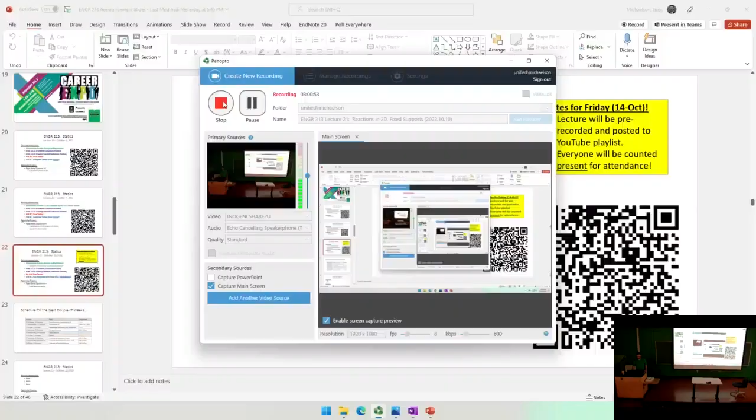Technology is working today, which is great, given what happened on Friday. If you weren't here, somebody had gone in here and yanked an adapter out. I'm pretty sure it wasn't one of the instructors, because these are key locked, I can't even get into that. So the computer was working, but it wasn't projecting to the screen, so we didn't record the lecture. We ended up going retro and doing the problem on the blackboard.

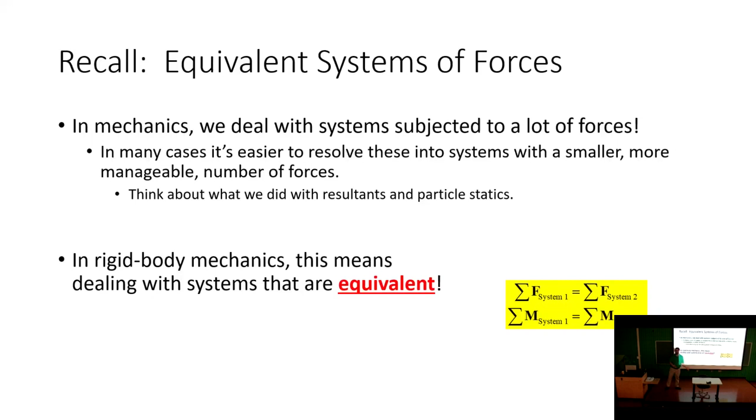So we talked before about the concept of two equivalent systems. The sum of forces in system 1 equals the sum of forces in system 2, and likewise with the moments. The two systems are equivalent if the sum of their forces and the sum of their moments are equal. But now we're in the land of 3D, or the land of equilibrium. Equilibrium states that a system is in equilibrium if the sum of its forces is 0 and the sum of its moments is 0.

For systems that were just particles, where all the forces met at a common point, we didn't have to worry about moments. Now we do, because we have systems where the forces don't all meet at a common point—they're coming in different directions. In 3 dimensions, that means we have 6 equations, 6 unknowns. This is what I meant when I said we're just going to have longer problems in the land of 3D. There's really no way around it.

In 2 dimensions, though, the problems get a lot more manageable. In fact, many engineers will do their very best to take problems and idealize them in 2 dimensions as much as possible. Do you lose a little accuracy when you do that? Yes, probably. But baked into that loss of accuracy is usually a bit of conservatism—you tend to overestimate the amount of force inside the system or overestimate the system response, which is always good in terms of design.

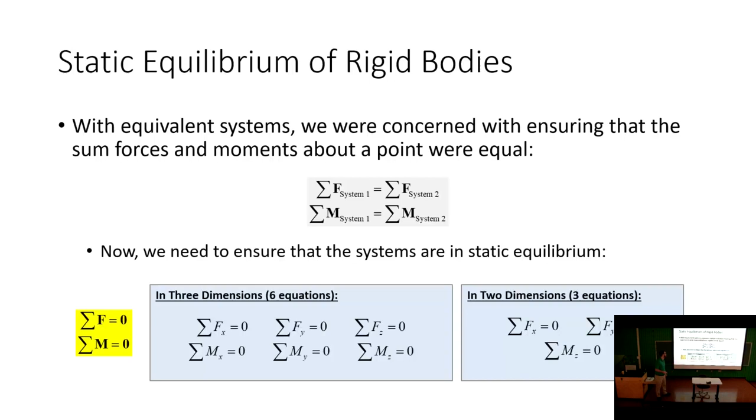We want our designs to be conservative and safe. So yes, we lose a little accuracy, but in engineering that's actually probably okay. Now, what we talked about last time was the concept of boundary conditions—the external forces applied to a system that are there to keep the structure in equilibrium. I used the example in class last time of the awning between the two engineering buildings.

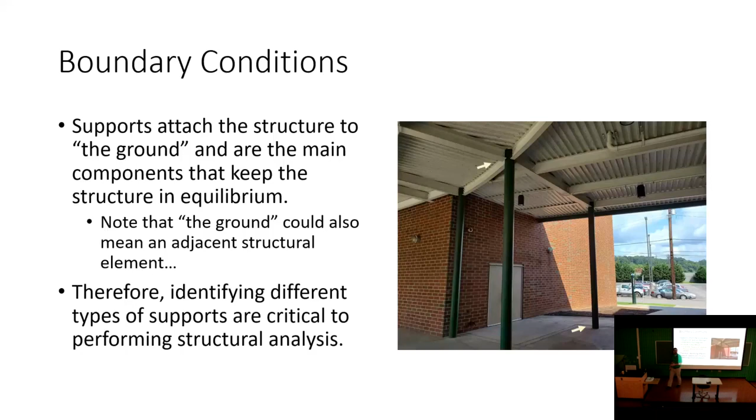I said, if I was modeling these columns, I would probably model the boundary condition on the floor or ground as a fixed support, whereas I'd model the boundary condition on top as a pin support. The difference is that the pin support prevents translation but probably isn't stiff enough to prevent rotation, whereas the column on the ground, assuming it's embedded deep enough, is not only prevented from translating but prevented from rotating as well.

From that, we got into the 3 main boundary conditions we deal with in 2 dimensions. Your textbook has many more, but I want to go through the basics again, and I wanted to show you some real world examples so you can see what's going on. Forgive me, I'm a civil engineer, so a lot of my images relate to civil engineering, but there are mechanical observations you can glean regardless of your discipline.

So, for example, the first and arguably most common is a pin support. I want to focus on this image on the top right. This might not strike you as a boundary condition we'd idealize as pin, but I can tell you that in engineering, we would. I've got this column, and these beams framing into the column. I propose that if I were to analyze those beams, the end condition would be pinned. Some of you would think, well, wouldn't it be fixed? Wouldn't those ends be prevented from rotating?

And the answer is not really, or not really enough given the magnitude of loads that these beams see. Typically, in civil engineering structures, if we want a boundary condition to be fixed, we would connect both the flanges and the web.

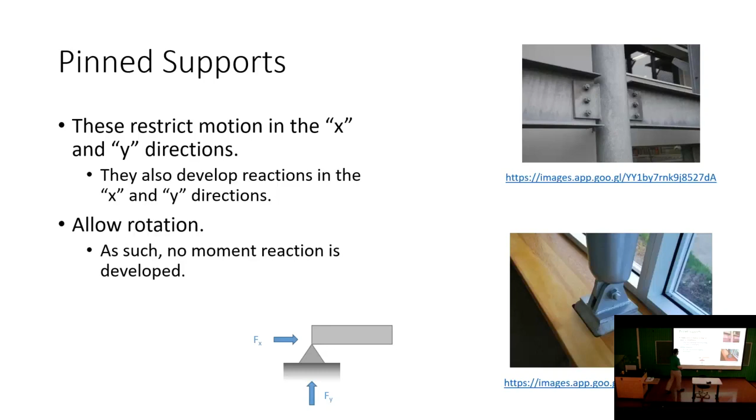And so this might also be another real-world example of that—a support that prevents translation but allows rotation. So that's sort of the difference there.

Rollers are reactions that only resist in the direction of rolling. It really doesn't matter which way the roller is, it's going to resist perpendicular to the ground.

If you remember, a very common set of boundary conditions that we talked about on Friday were pin supports and roller supports. And if we use both of those together, we have a name for that—we call it simply supported. We see that all the time in structural engineering.

Again, forgive me, I'm a bridge engineer, I relate a lot of things to bridges. But a good example of pinned and roller supports that you might see in the real world are fixed and expansion bearings in bridges.

So I see a lot of people here wearing hoodies and jackets. Is that because it was a little chilly out? Whereas a month ago, it wasn't so chilly, right?

It was pretty warm. Okay, so a lot of the bridges that are outside undergo a fair amount of thermal gradient—there are hot days and there are cold days. When things heat up, they expand, when things cool down, they contract. Bridges are no different.

So we like to have some supports that are fixed and some that allow that expansion. And so if you're ever on a DOH inspection, take a look at the region that connects the beams to the abutment, if it's not encased like an integral abutment—you'll typically see fixed and expansion bearings.

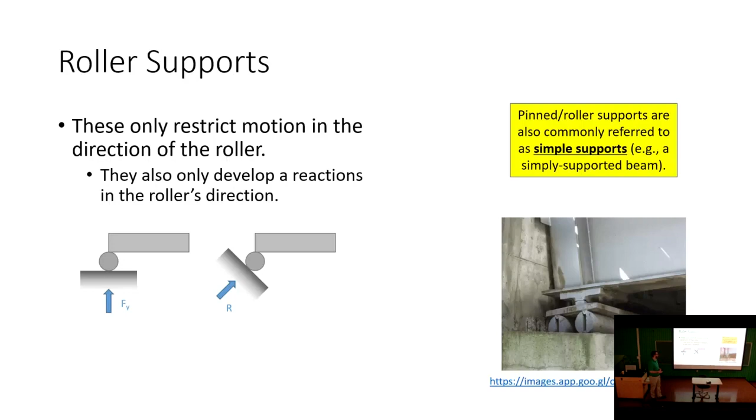The expansion bearings might have plates with slotted holes that actually allow a little bit of translation because we want the bridge to be able to move a little bit. If we restrict it, we can get a lot of thermal stress in that bridge, and that's not very good.

All right, so here's some examples of fixed supports. Again, fixed supports are ones where we are directly connecting the flanges. In the land of concrete design, for example, if you're looking at the 3rd Avenue parking garage, you can tell which beams and columns you would treat as fixed supports because they're all cast together.

Whereas pin supports, you have these precast elements that sort of sit on top of one another. But anytime that you're directly connecting the flanges, we tend to treat that as a fixed support.

And the deal with fixed supports, this is going to be the start of the show today, is that fixed supports each carry 3 unknown reactions: an unknown reaction in the X direction, an unknown reaction in the Y direction, and an unknown bending moment. There is an unknown bending moment inside the support that we need to deal with.

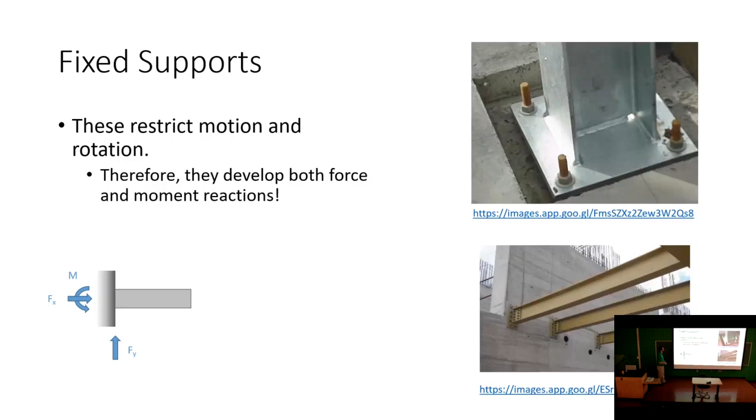The idea is, imagine you were holding a somewhat flexible ruler in your hand, and you took your ruler and pressed it. Your finger would have to resist that tendency for the ruler to want to twist, and that's the moment reaction we're trying to capture when we assess equilibrium. Does that make sense? Okay.

Now, here are our 3 reactions, the most common ones that we deal with. We did, we were going to do 2 examples in class on Friday. We ended up only getting to 1—we weren't able to get to this one.

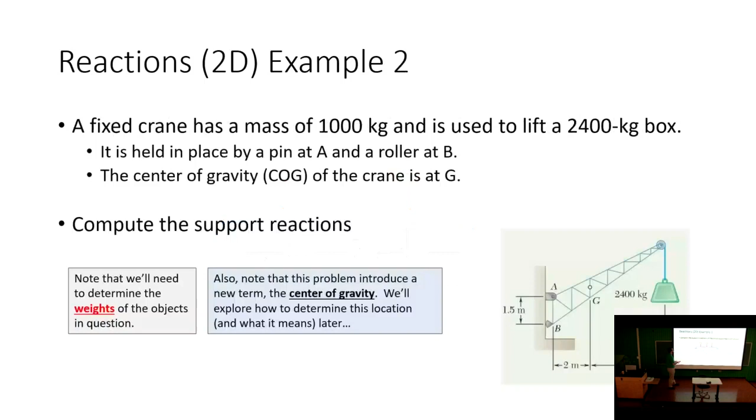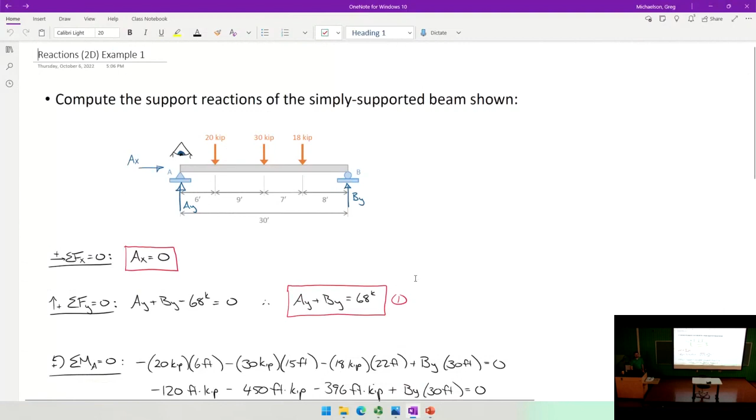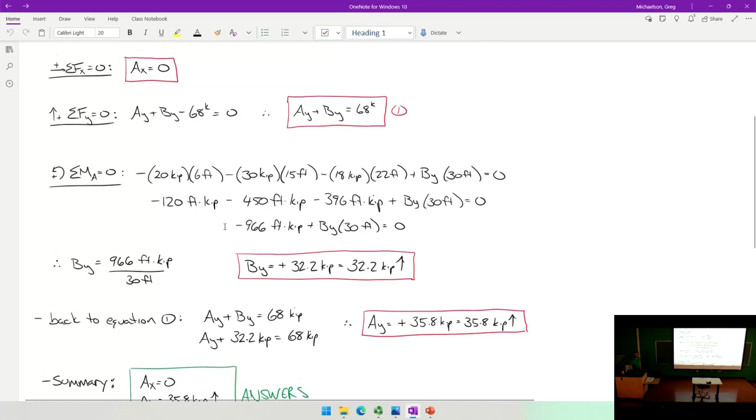I had a question about whether I'd put these in the notebook. I originally said no, but then said, you know what, the heck with it. So if you open the OneNote, you'll see the first example we did in class on Friday, and these were the answers we got at the end. I think y'all remember that. I went ahead and put that in the OneNote, and I also put the second example in there.

To be honest, there's not really a whole lot that we missed. It's just more stuff to look at.

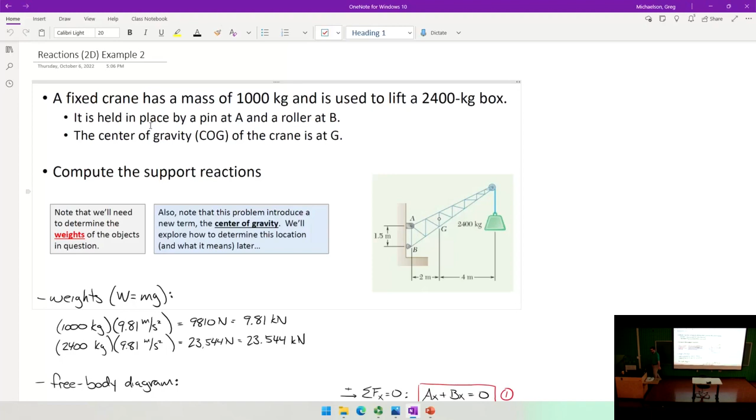The only thing with this example is there was a crane. The crane had a mass of 1,000 kilograms, and it supported a 2,400 kilogram mass. So the first thing we needed to do is convert that to weights. But that part's really easy.

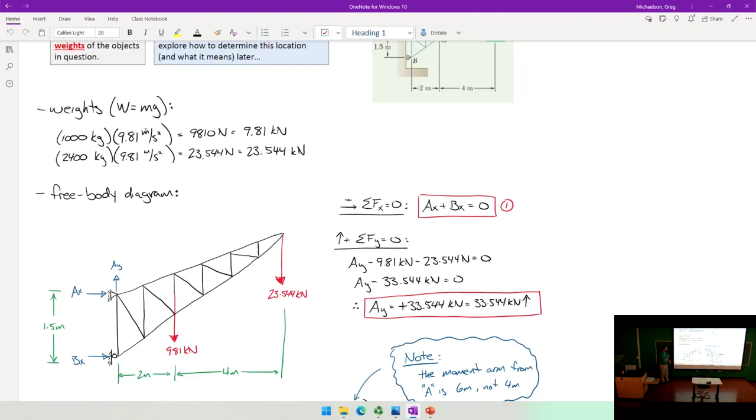What made this example maybe a little different is that the reactions are over on the side as opposed to being on the bottom. But it doesn't make the problem any different or more difficult. We just go about it the same way: identify our forces, identify our reactions, take care of our equations of equilibrium, and solve it out.

And I go through the math. I also try to put a bunch of notes anywhere I think the analysis requires a little explanation. I don't think we missed a whole lot with this example, but I wanted to include it in the notebook for posterity.

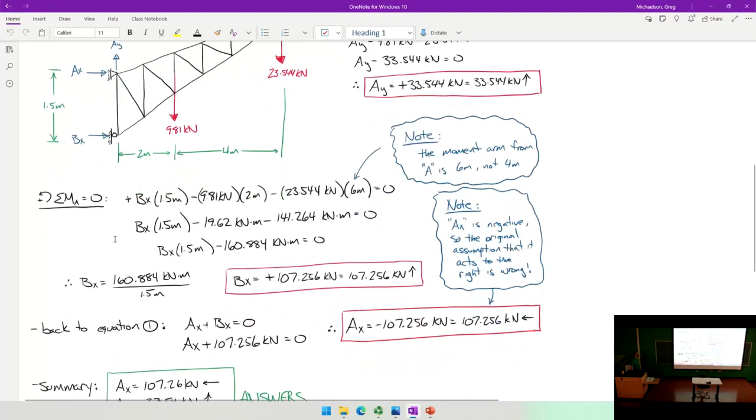I will say that in this example, I assumed both of the horizontal reactions were acting to the right. When it was all said and done, one of them ended up being negative, which just means it acts to the left. So again, not very difficult.

Any questions on this? Would you like me to go through this in a little more detail? I don't want to spend too much time on it because I want to spend some time on our example today.

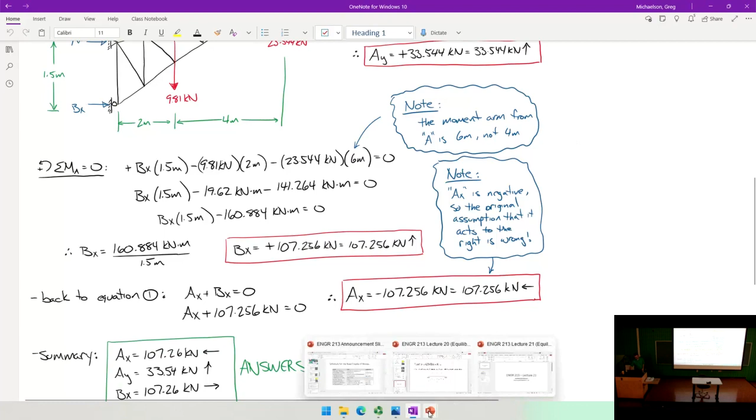So here's the lecture I was going to cover today. One thing I wanted to mention is that your textbook has oodles and oodles of different support conditions that, if we wanted, we could employ. I'm not going to get very fancy or complicated in this section of the course. All I'm really worried about are roller supports, pin supports, and fixed supports.

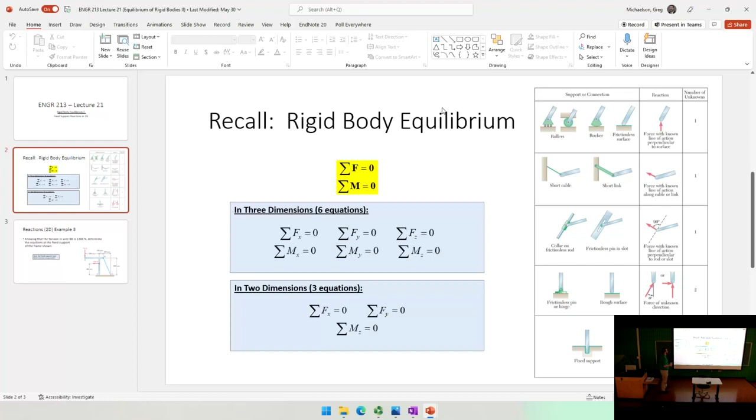999 out of 1,000 structural engineering models—and when I say structural engineering, I just mean structural systems, that's not just a civil concept, it applies in general—any of those systems are going to employ those three fundamental boundary conditions. Only when we get into somewhat fancier stuff are we going to employ some of the others. And if I'm being honest, if we're getting into the land of kinematics and design of machines, well, that's another topic in and of itself anyway.

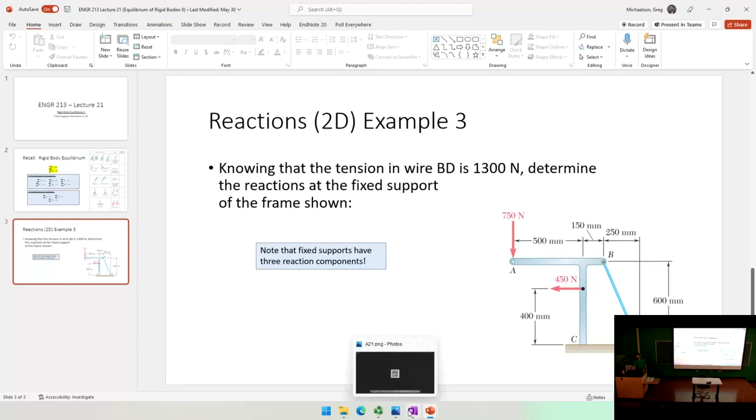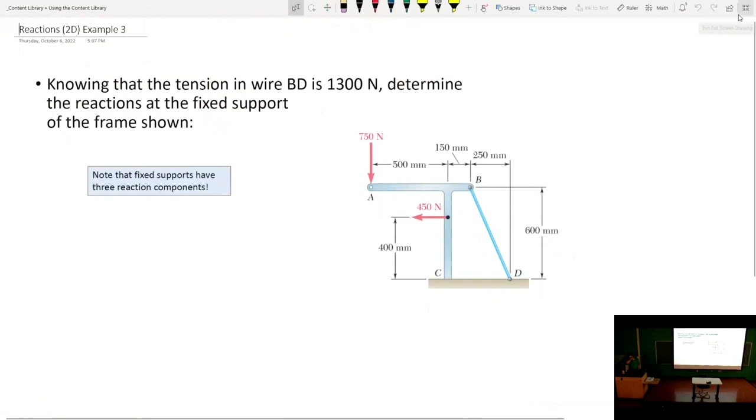Sound good? Let's get into the star of the show today. So today I want to look at this example. Let me pull it up in the notebook here. Let me make it a little bigger. So this is going to be the star of the show today.

I have here this sort of rigid frame that's subjected to a series of loads, and I have a couple of things going on. I've got a 450 Newton load here, a 750 Newton load here. I've got this cable, and this cable is applying a tension to the frame of 1,300 Newtons. So I know that I've got a 1,300 Newton load right there.

What I want to do in this problem is determine the reactions at C. Now, let's be clear—oh, I didn't put my other line here in the end—let's be clear, in order to do that, these are the three equations of equilibrium that I'm going to need to deal with.

Before I start identifying unknown reactions, the first thing I want to do is handle this 1,300 Newton force. The reason why is because that force is at an angle. I'm trying to sum forces in the X direction and sum forces in the Y direction, and this is not oriented in the X or the Y. It's not like this one, which is obviously aligned with the Y-axis, or this one, aligned with the X-axis. This one's at an angle, so I'm going to split it up into its X and Y components.

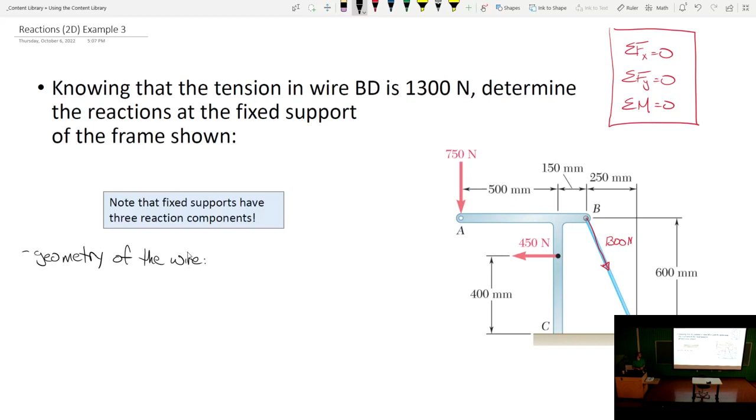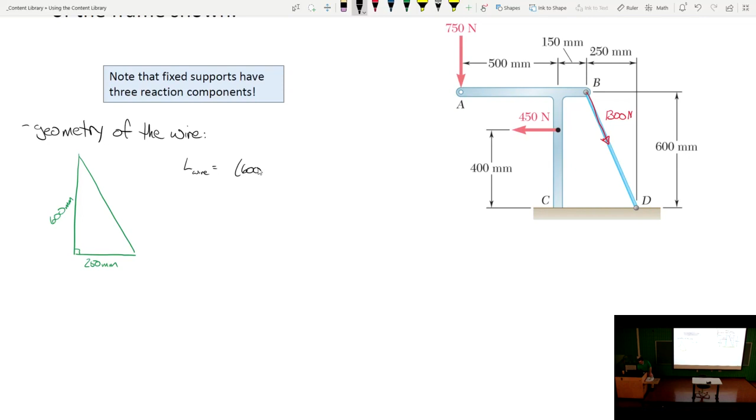So what I've got going on here is I've got a wire that is 250 millimeters this way, 600 millimeters this way. So first off, I want to find the length of the wire. What is that?

Breaking out the Casio FX115 ES Plus or similar, anybody got an answer? 650. 650. So this is 650. Okay? Why am I worried about that?

Here's why. Recall that I can take a vector and separate out its magnitude and its direction with the unit vector. So here's why I'm doing this.

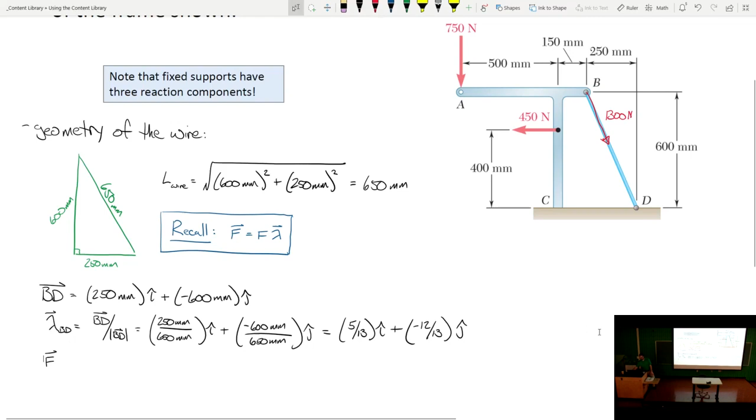So therefore, if I want the force, let me scroll down a little bit. If I do this...

See why I left it in fractional format?

Bless you. Bless you. It's that time of year, isn't it?

So 5/13 times 1300, and negative 12/13 times 1300. I think that's going to be 500 I minus 1200 J, all in newtons. Is that a fair statement? Everybody okay with that?

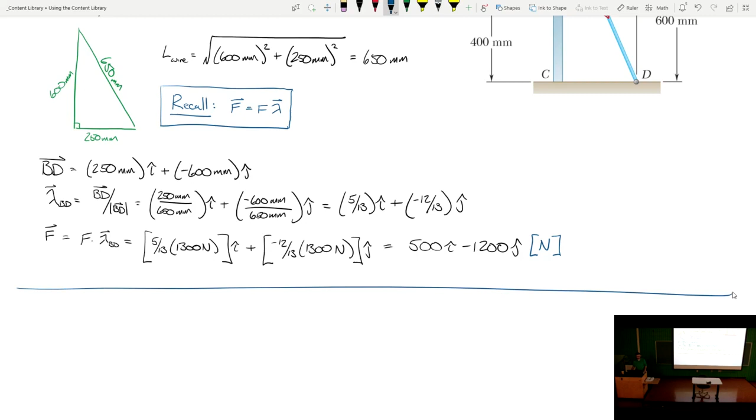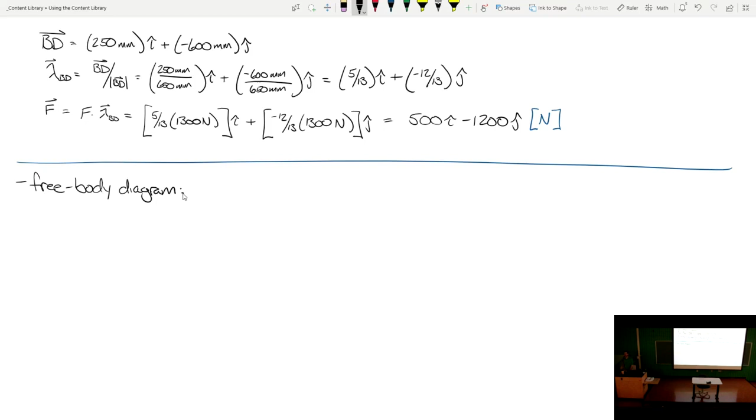Okay, here's the reason I did that. The reason I did that is because I want to draw a free body diagram, but I want to try and eliminate those angular loads.

Okay, so let's see what we got here. Let's try and draw this to scale as much as possible.

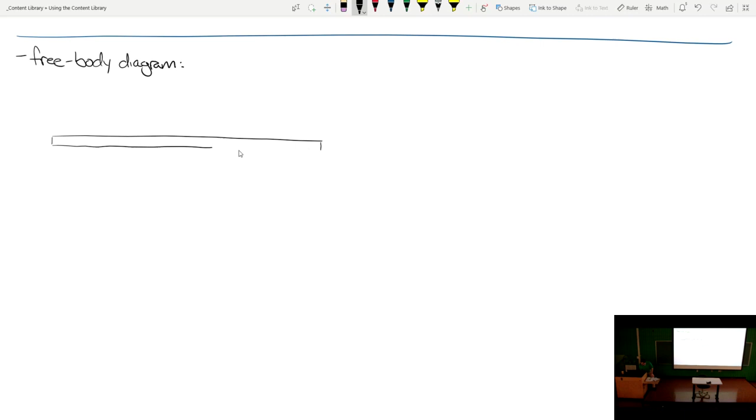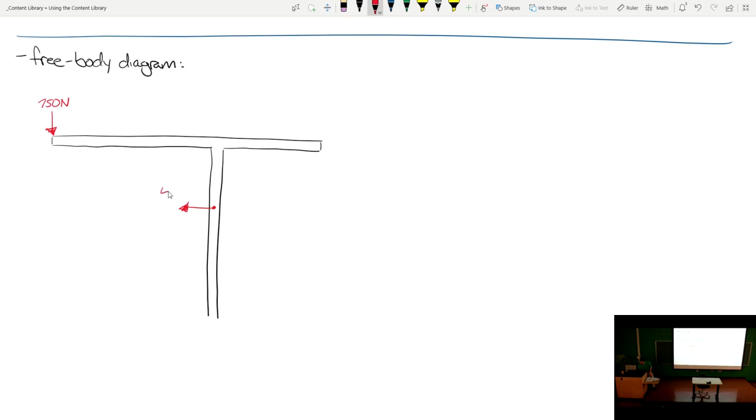Okay, so there's my frame. What do I have going on here? I've got this load here, which is 750 newtons. And then I have a load somewhere about right here, which is 450 newtons. Let me move this down just a little bit.

Now, right here, we had this angular load of, what was it, 1,300 newtons? I'm going to replace that, and instead I'm going to write, if you want, you can use a little dotted line to say this is 1,200 newtons, and this... maybe just the dotted line is indicating that it was a diagonal load, and I split it up into its X and Y components.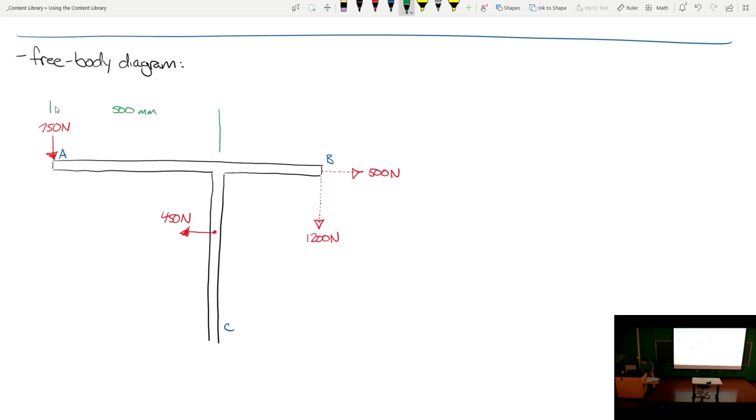All right, let's come up with some letters to make sure that we're all talking about the same points. This is A, B, and this is C. Let's come up with some dimensions. Right there. This right here is 150.

Now we have a support condition down here, which I'm going to talk about here in a second. But I know that this dimension here is 400. The entire height of the whole frame is 600.

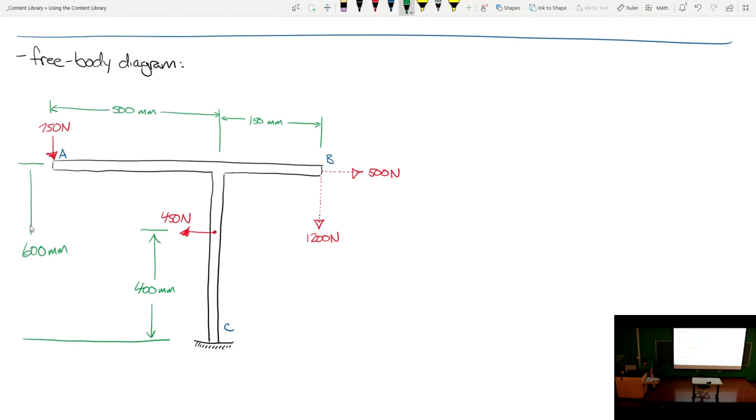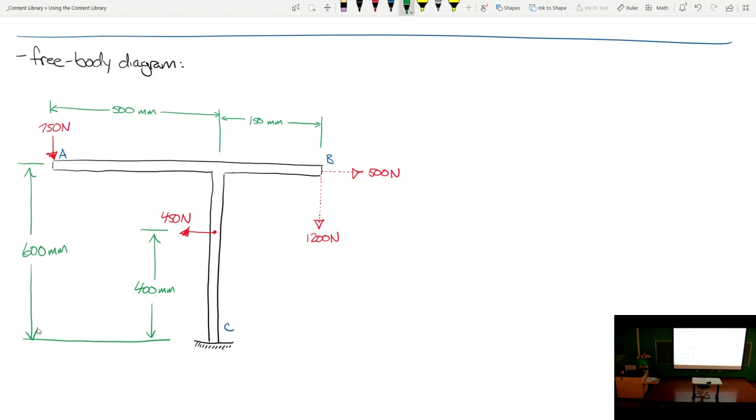And I think I've got all of my known forces and dimensions laid out. But the only thing left to deal with is this, what's going on here at C. C is a fixed support, right? So how many reactions does a fixed support have? 3, right? Now, what I'm going to do is I'm going to assume some directions, okay?

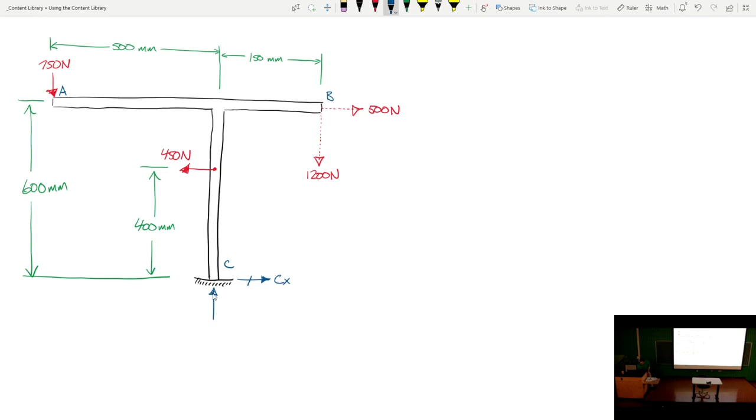And let's just assume positive directions. So we'll call this CX. And typically I like to sometimes throw a little dash mark through my reactions to indicate just that it's a reaction. We'll do CY like that. And then there's a moment reaction.

Now, moment reactions are rotational, right? And so there's either counterclockwise or clockwise. I'm going to assume counter. Call that MC. Okay.

Now, I want to be crystal clear: there's no magic behind these assumptions. I just guessed some. If I guessed wrong, the math will tell me. I'll get a negative answer. So if I get a negative answer for CY, it just means CY is acting down. If I get a negative answer for MC, it just means it's acting clockwise. I need to guess something for when I write my expressions, but it doesn't really matter what I guess technically.

Now, as problems get easier, I guess I should say, there are going to be points when you could just look at it and say, yeah, it's acting up, and just guess up and save yourself a little hassle later. Okay, so far so good? So now let's start applying our equations of equilibrium. Let's start off with the first one.

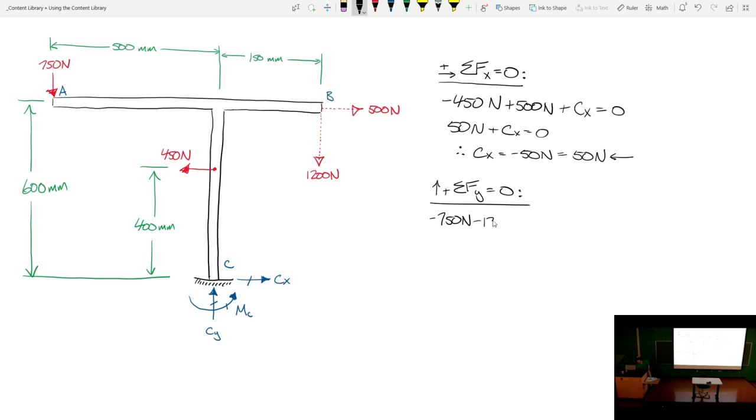Do I consider the 500? Do I consider the 1200? Yes, positive or negative? Do I consider the CX? The CY? Positive or negative? Do I consider the MC? Did I get them all? The sum of those must be equal to 0.

So, 750 and 1200. So now, CY—if I move the 1950 over to the other side, I get a positive 1950. So what does that mean? That means my guess was correct this time. CY is 1,500 newtons acting upwards—or sorry, 1950.

Pretty simple, right? Now let's sum moments. With any moment expression, we need to pick a location. Where do you think would be a good place to sum moments? C. All right, I tend to sum moments where there's a lot of stuff intersecting, and so naturally for me, C is a good place. I'm going to scroll down a little bit so I have more room to write—I don't want to scroll down too far. We'll take counterclockwise moments as positive.

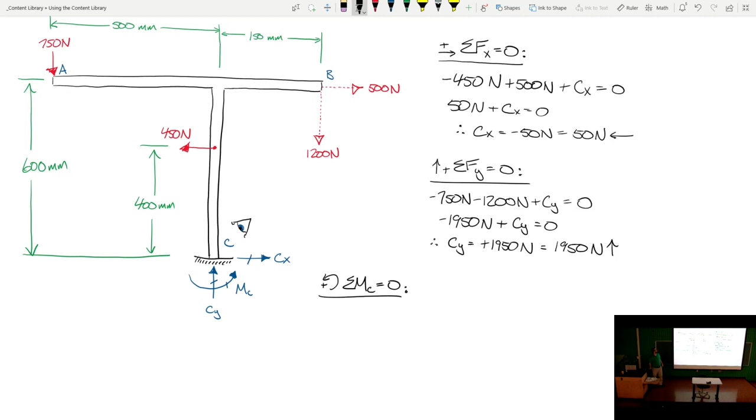So we take each force one at a time. Let's start with the 750 newtons. Does it want to rotate point C? Yes, it does. In what direction - counterclockwise or clockwise rotation? Counterclockwise rotation. So is that a positive or negative moment? Positive moment, because we're taking counterclockwise rotations to be positive.

Now, what is the moment arm? What is the shortest distance from the line of action of that 750 Newton force to C? 500, exactly right. So this is going to be positive 750 newtons times 500 millimeters. That's exactly right.

What about the 450? Is it causing rotation? Is that counterclockwise or clockwise rotation? It's counterclockwise, which makes it positive. And the moment arm, how far is it from the line of action of this force to point C? 400 millimeters. So positive.

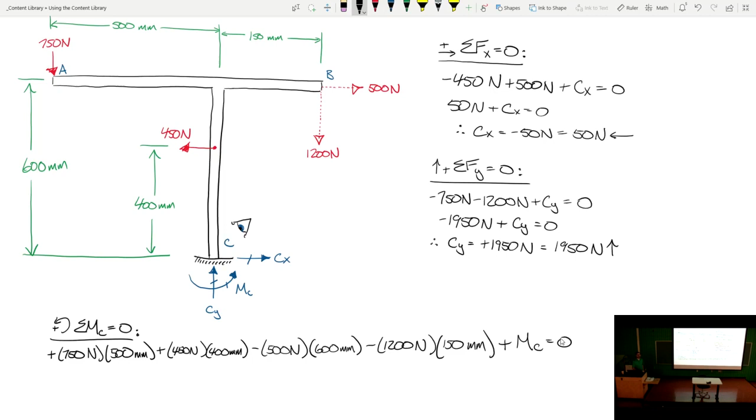Equals 0. Equation got longer, but not harder. Now we got to do a little bit of arithmetic. So 750 times 500, that's 375,000 Newton millimeters, plus 450 times 400, that ends up being 180,000.

Newton millimeters. That's not an equals, it's minus. 500 times 600, that's minus 300,000. Minus 1,200 times 150, 12 times 15 is 180, so 180,000. Plus MC is 0. So I got a 180, they're going to cancel. 375 minus 300 is 75,000.

So therefore, MC is negative, which equals negative 75,000. And it's going the other way - it's going clockwise.

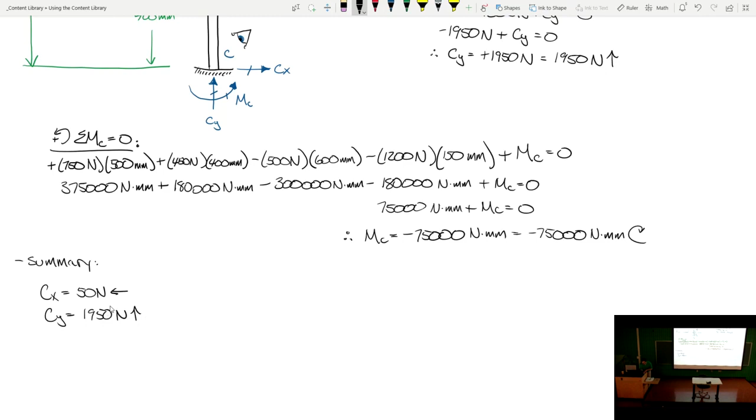So to summarize our answer, the only way that this system is in static equilibrium is if Cx is 50 newtons to the left, Cy is 1950 newtons upwards, and MC is - I put a negative there, but I don't need to because I already took care of the sign - 75,000 Newton millimeters this way, or if I want to abridge that, since there's 1,000 millimeters in a meter, I could say 75 Newton meters that way. Either way works.

We'll stop for a sec, see if anybody has any questions. Hopefully it's pretty straightforward.

Make an assumption about your unknowns, write your equations of equilibrium, and solve. If you get positive answers, your assumptions were correct. If you get negative answers, just flip the direction. That's it, it's that simple.

Now I will tell you, 3 dimensions is no different at all. The only thing is that it's longer, and we don't have the luxury of just doing F times D for all of our moments - we have to do R cross F. So the problems just get longer because we're having to describe vectors and then cross products and all that, but it doesn't make it any more or less difficult. Sound good?